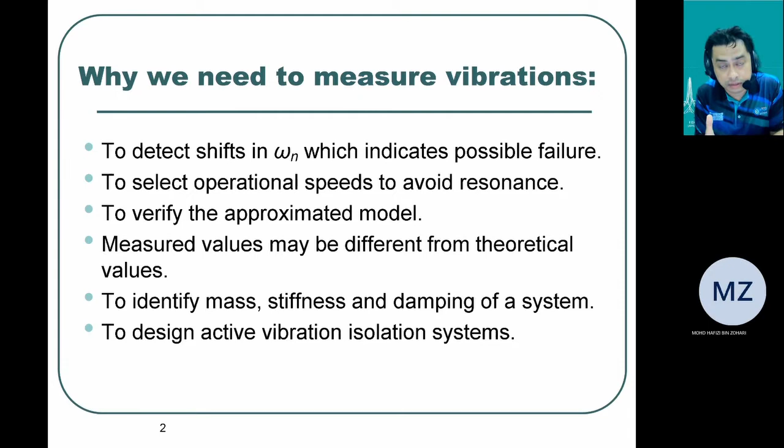Moving forward, the vibration measurement. This is actually the block diagram for the vibration measurement. First, we have the input, which is the vibrating machine or vibrating structure. We use the transducer, in this case a vibration transducer or vibration pickup, as the transducing element. Then we go to the next element, which is the data conditioning element. In this case, it is a signal conversion instrument, with which we convert the signal from mechanical into an electrical signal. And then we have signal processing and display, either in a recorder unit or in the computer.

And then after we have completed the acquisition, either we store or we display, and after that we do data analysis. Usually for vibration measurement we collect the data and then we do post processing of the data, because we deal with a huge amount of data. So it's very important for us to do post processing.

If we have lag in terms of showing the actual measurement, it will give a false representation of the data. So we have to be careful on the type of data that we want to process. All right, so we're gonna look at a few types of transducers that will be used frequently for the vibration pickups or vibration transducer.

First, we're gonna look at the variable resistance transducer. This kind of transducer is based on the strain gauge. The strain gauge will be pasted on the cantilever beam. We have a cantilever beam here that connects with the mass. The whole cantilever beam is fixed on the base structure. The base structure will move together with the vibrating body. It will be put on the vibrating body, so the base will move together with the body.

Imagine that the mass tries to remain at its position while the base is moving up and down. So the mass will try to stay at this position, and this cantilever beam functions as the spring. It has its own K. But this K here is not the stiffness of the spring; this K is actually the gauge factor of the strain gauge. In the previous lecture, I usually put it as G, gauge factor, but for this topic it uses the K value. Do not confuse it with the K of stiffness.

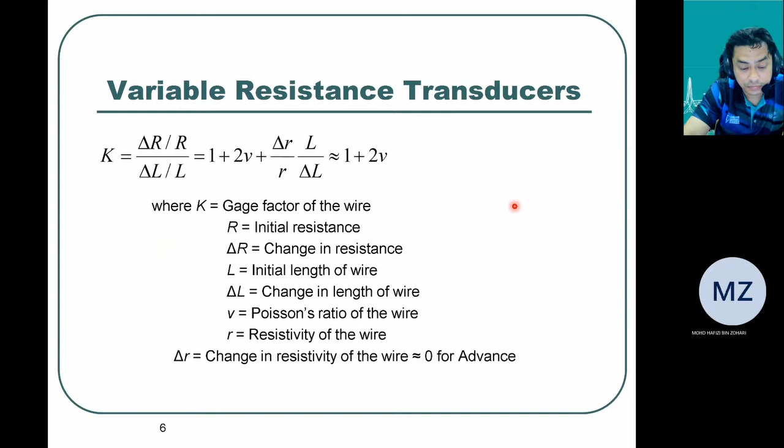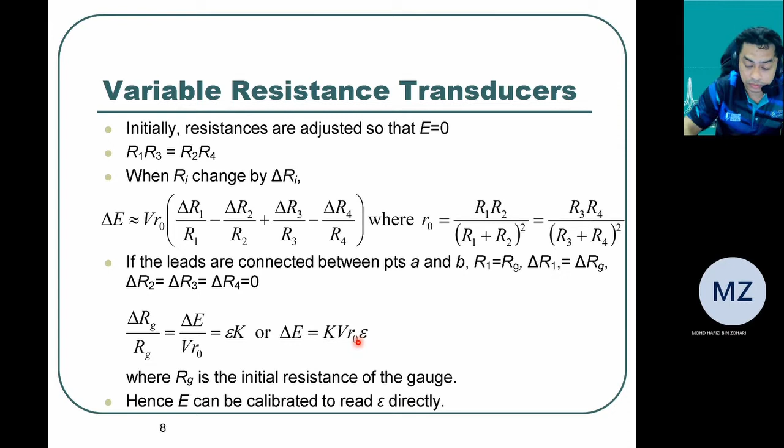So now this one is the theory if you use variable resistance for the measurement of vibrations. With the same structure, we can also use piezoelectric transducers. The fundamental is we want to find the change of voltage due to the vibrations, because the change of voltage will indicate the change of strain. So in this case, if you use a piezoelectric transducer, the charge generated from the motion x(t) can be related with the equation here.

So first, we know that for piezoelectric materials, the charge Qx is equal to Kf. K is the piezoelectric constant. If you have force acting on the piezoelectric materials, going further, F is equal to A, the area of the piezoelectric structure, times the pressure that acts on the piezoelectric materials.

So if you look at here, we have the same concept. The difference is this one is a spring, the previous one is a cantilever. Why do they use a cantilever? Because a cantilever can be used to paste the strain gauge. But if we're not required to have something to paste the strain gauge, we use a spring. And in this case, the spring just holds the mass.

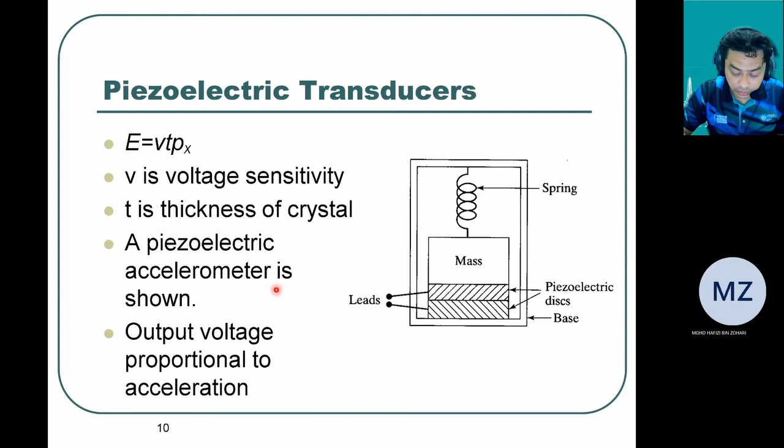Now this one is quite easy compared to the strain gauge. Just a simple equation: E equals V times T times P. V is the voltage sensitivity, T is the thickness of the crystal, and Px is the pressure, related to the force from the mass on the piezoelectric materials. So if you look at this example, we have a crystal with a thickness of 2.5 mm subjected to a pressure of 50 psi.

Okay, find the output voltage if the voltage sensitivity is 0.055 V·m/N. So just plug in the value. First, we know that the voltage sensitivity is in units of voltage, meter and Newton. So that means 50 psi needs to be converted into Newton per meter first. Then that's the conversion factor here. Then just calculate straight away.

We get 47.4015 volts. So it's quite a huge voltage, because 50 psi is a lot. We usually feel the pressure of our car tire at about 30 psi. So 50 psi is a very huge amount. That's why it got about 47 volts from the piezoelectric.

All right, so we looked at the variable resistance. Now we're looking at the electrodynamic transducer. Also related to vibration, but now we're looking at the velocity. In the previous one, we related it with x(t), the displacement of the mass. It's related to the strain and also the piezoelectric charge. Now for the electrodynamic transducer, it relates to the velocity of a moving body.

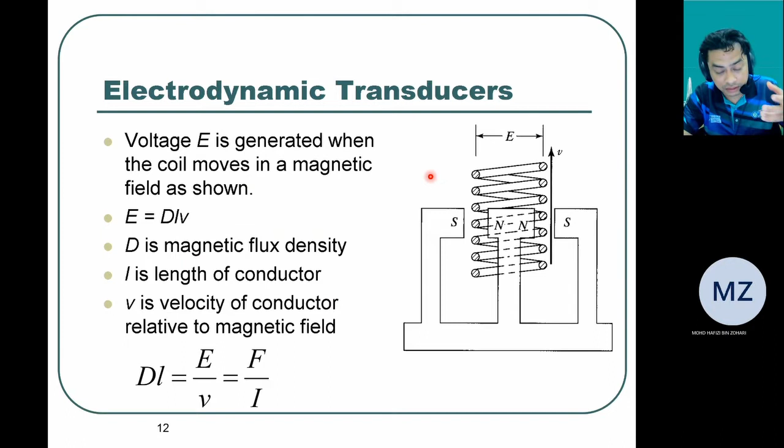No input, no output. So if you compare with the previous one, that one is totally generating the voltage due to the motion of the coil and the magnet. But the LVDT, or linear variable differential transformer, depends on the input voltage, the primary coil that gives the magnetism to the core, and then it will cross with the other coil and generate the output here.

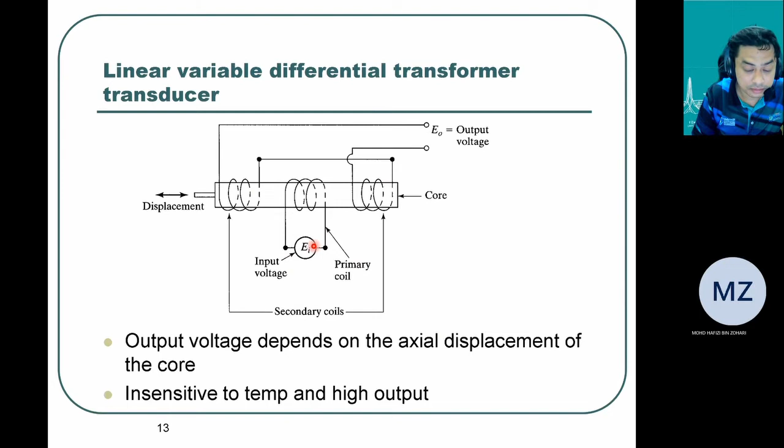All right, but this one, because it has its own input, can give a huge amount of voltage change. For a small displacement, we can get a big output voltage, so we can have a very sensitive measurement. Of course, a sensitive measurement leads to more accurate measurement compared to just a pure coil and magnet. Okay, so this is another view of the LVDT, linear variable differential transformer.

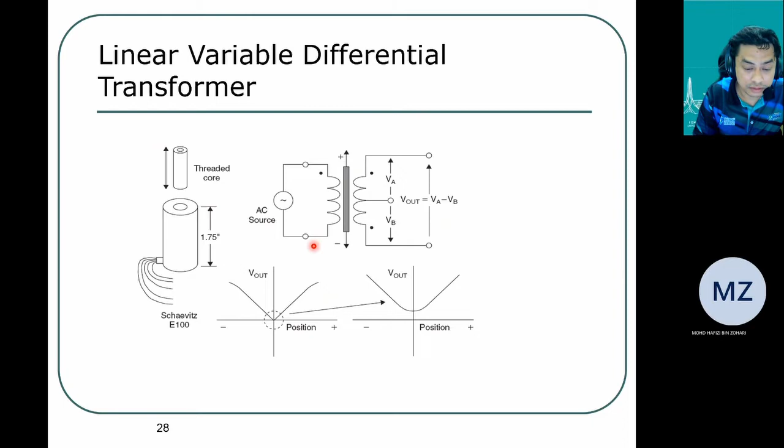Then we go to the accelerometer. We look at the accelerometer. What is an accelerometer? An accelerometer is a device that measures acceleration, including static measurement as well as dynamic measurement. Most of the accelerometers in the market are piezoelectric-based accelerometers.

You can Google. There are a lot of examples, and in our vibration lab I have a lot of examples of accelerometers. In fact, in the lab we also try to build our own accelerometer. The output of the accelerometer, as I mentioned earlier, is an electrical output, either from the strain gauge, the piezoelectric, or the capacitor if you use a capacitor base. So the electrical charge or electrical signal is proportional to the acceleration of the body that we are measuring using this instrument.

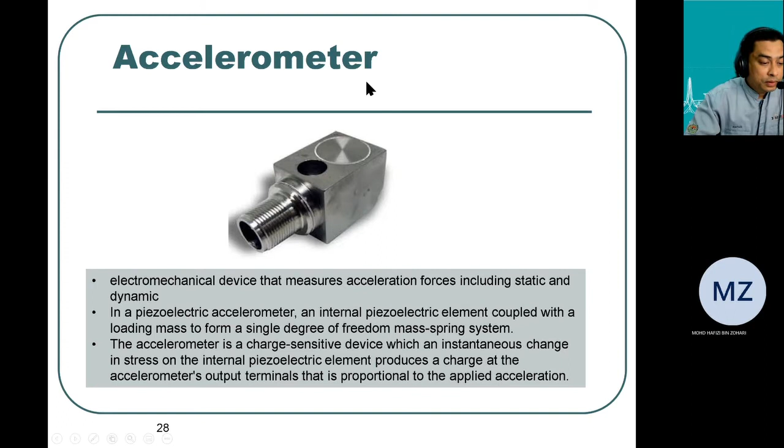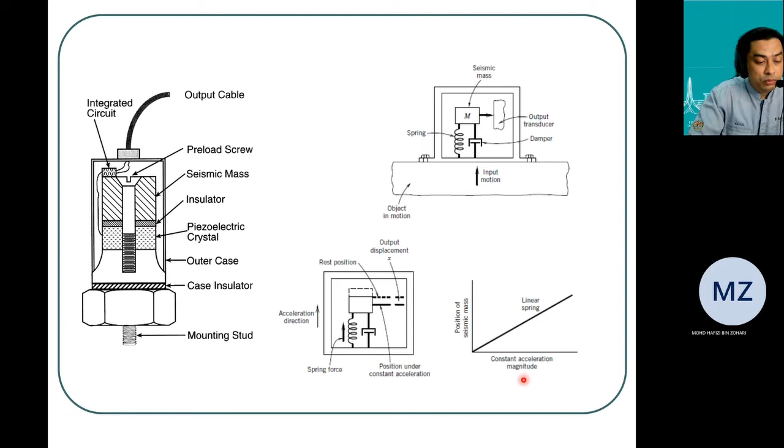So basically, if I show this real construction of the accelerometer as a spring mass damper relation, it is something like this. In terms of the position of the mass, it goes up and down. The position of the mass is linear with the acceleration magnitude. So the more displacement of m, the more acceleration of the body, the object that we want to measure.

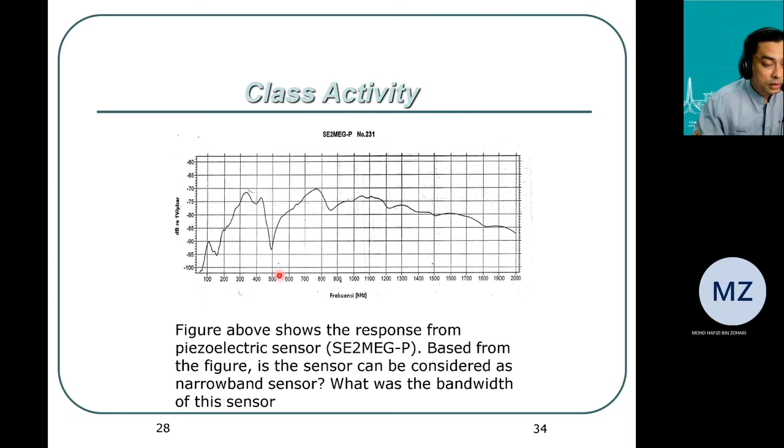Okay, if you look at this one, this is actually a frequency response curve, the same as this curve, but this is theoretical. Looking at this one, at a certain range it is flat, but at some range it has a very huge resonant frequency, which is where we have high sensitivity of the sensor.

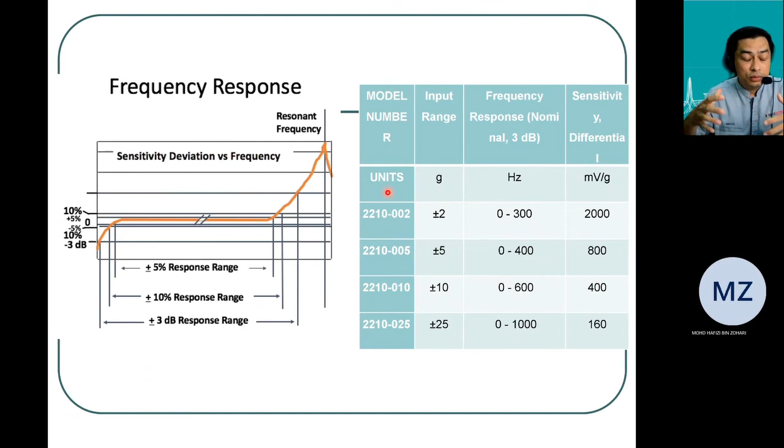the sensitivity becomes low. Related to this graph here, if you have a broader range, usually it has very low sensitivity, but this area here has very huge sensitivity, but in terms of range, it's a very small range only for this kind of measurement. Okay, that's how you read the specification of any accelerometer when you want to choose the correct accelerometer for your application. All right, so we finish with the accelerometer specification. Hopefully after this you can choose the best accelerometer for your application.

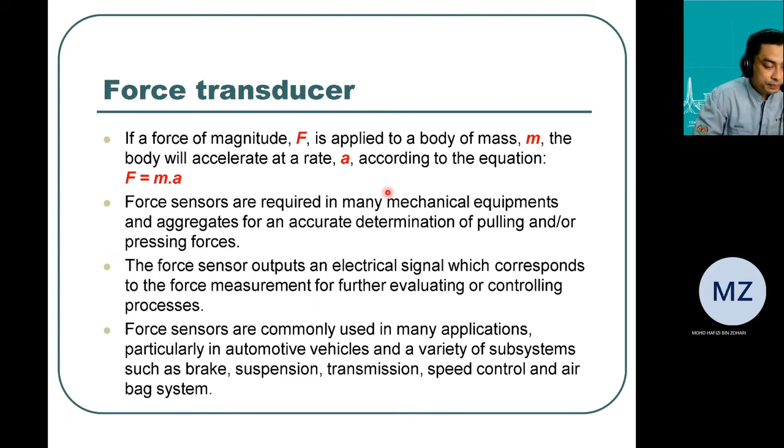And then if you look at this one, we also have a force transducer. So of course we have F equals MA. When we discuss vibrations, it's actually related to force as well, because any acceleration is because of the existence of force. Okay, so force can be measured by many methods. One of the methods is by measuring, of course, A, acceleration. So we measure A and then we can find F. Then how can we measure M?

Okay, mass. We have a lot of experience measuring M as weight measurement. I believe everyone of us already knows how to measure it and has their own instrument in their house to measure their own weight. But the fundamental of weight measurement is they use either the load cell, pneumatic load cells, or electronic load cells, or most fundamentally, a mass balance instrument.

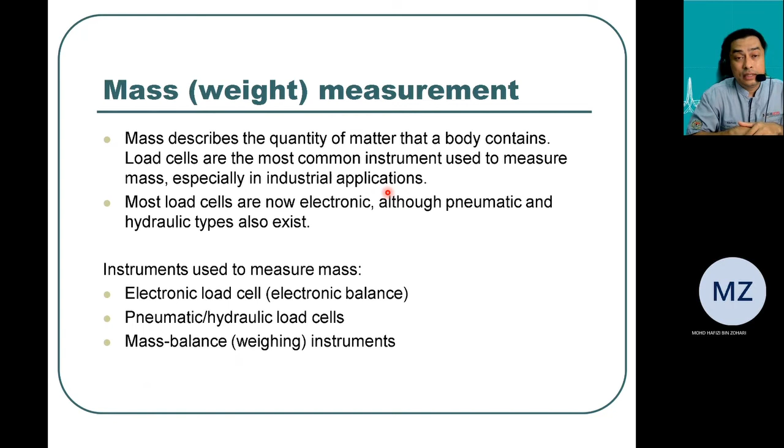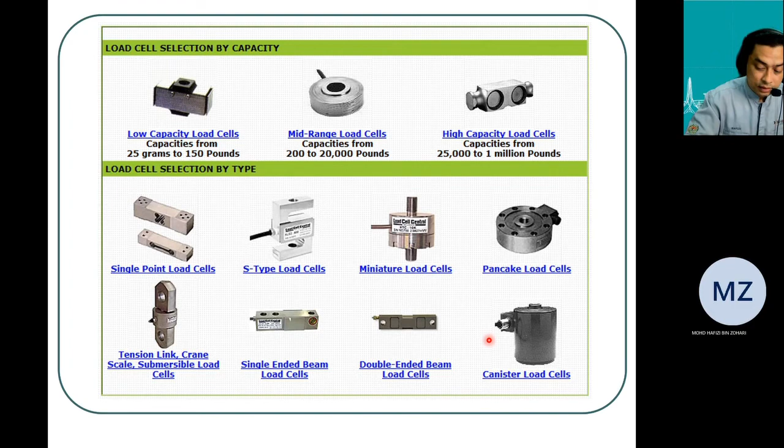All right. So then we move to another type of mass measuring device, which is the pneumatic or hydraulic load cell. Same concept as the electrical base: it must induce some sort of movement. If we look at the previous load cell, it deforms. The deformation can be sensed, detected by strain gauge and also the piezoelectric gauge. For this one, it produces some sort of deformation in the air gap,

it's actually the air pressure. If you put a mass, a very huge mass, the pressure inside the air will be uniform, and it will transfer along the line that has the same air. For example, we have this one. If we have air along this tube, the pressure is uniform. We put a pressure here, the pressure starts here, but along the way in the pipe, the pressure will

still remain the same. So if you can relate that air pressure with the mass, then we can find the mass. For the electrical base load cell, we relate between mass and the electrical signal, the voltage. But for this one, we relate the mass and the pressure of the air. Not only air, we can use fluid as well. So if you use air, it is pneumatic. If you use fluid, for example oil, it is the hydraulic type of load cell.

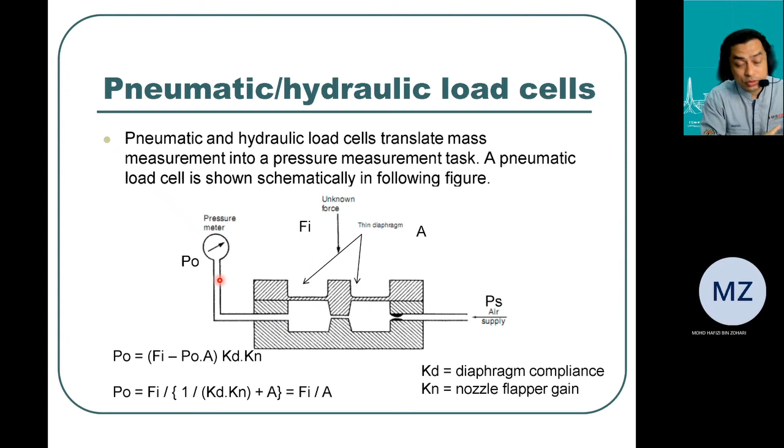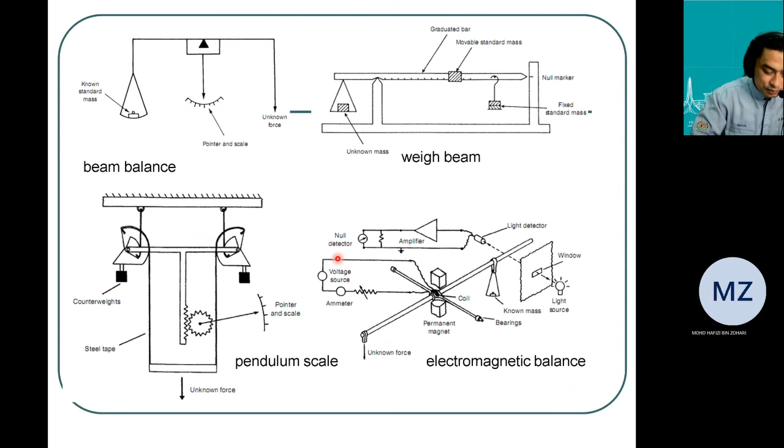All right, so now we looked at the accelerometer, and we looked at how to get force, which is basically using an accelerometer and calculating the mass. And then this one is the torque transducer. For torque transducers, we have three common methods. The first is measuring the reaction force of the shaft. The second one is the Prony brake, and the third one is measuring the strain produced by the

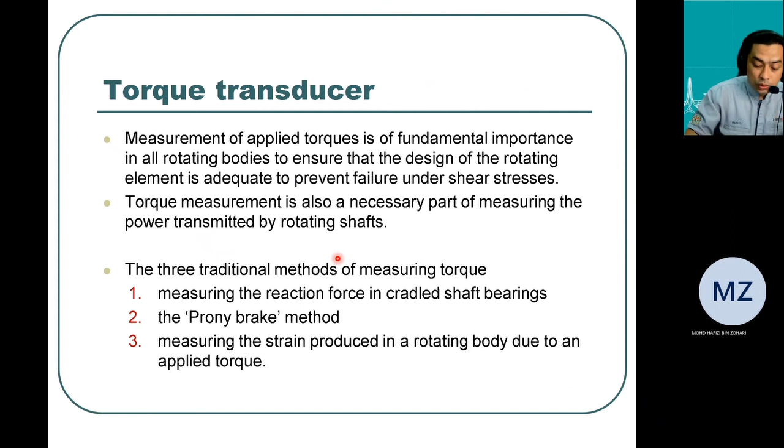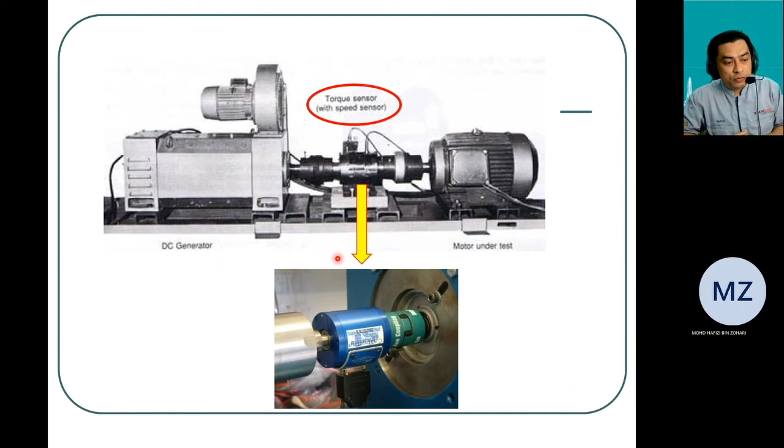rotating body. Of course, when the body rotates, it will have some sort of twisting effect, and that twist is produced by the torque. Then we can measure the twisting using a strain gauge or any gauge that can measure the strain. So we look at these transducers one by one. This is actually the torque sensor. You can Google; there are a lot of examples of torque sensors available.

Basically, this one is a dynamometer. So we have a motor that works in this area here, coupled with the dynamometer. Inside the dynamometer, it has some sort of a power absorber. It tries to hold the movement of the motor.

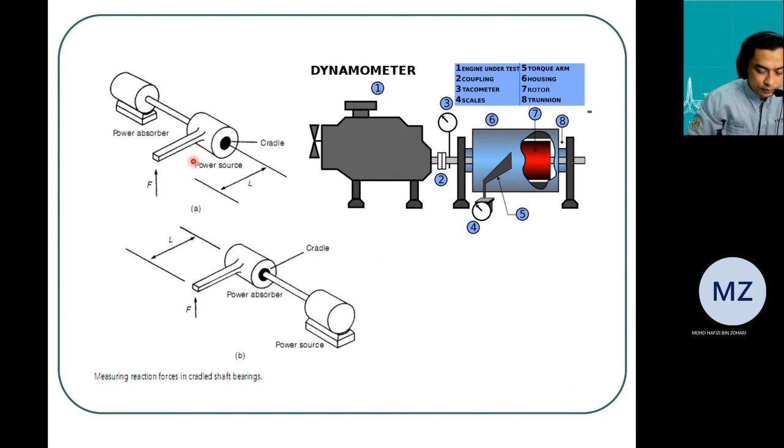All right. So the Prony brake is a simple mechanical system. It's actually some sort of brake coupled with the moving shaft. It will try to rotate the drum, and that rotation will pull the spring. We measure the force in the spring, and then we can relate it to the torque that is the source of the movement in the shaft. Okay.

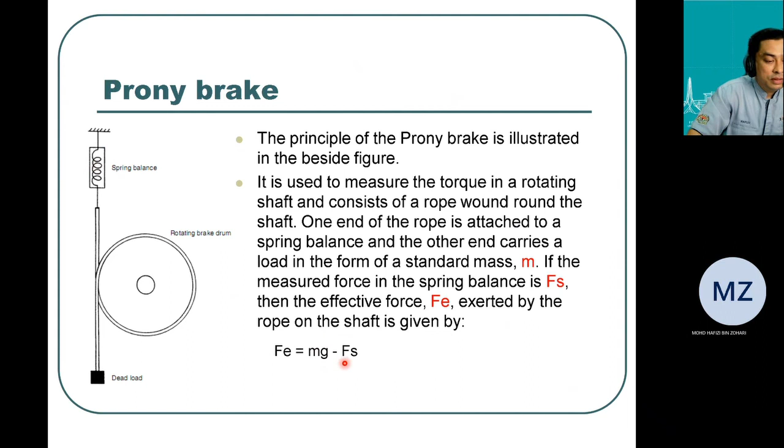So the equation is something like this. Fe is the force exerted by the rope, mg is the mass, the dead load here, and Fs is the force of the spring. So Fe is equal to mg minus Fs, the force measured at the spring. Then we can find Fe. That's how the Prony brake works.

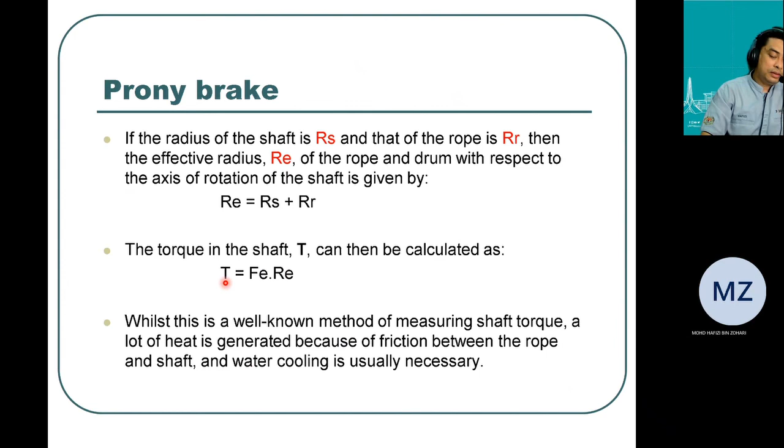Then from that Fe, you times by Re. Re is the effective radius. Force times the radius, you can find T, the torque. That's the concept of how torque is measured by the prony brake.

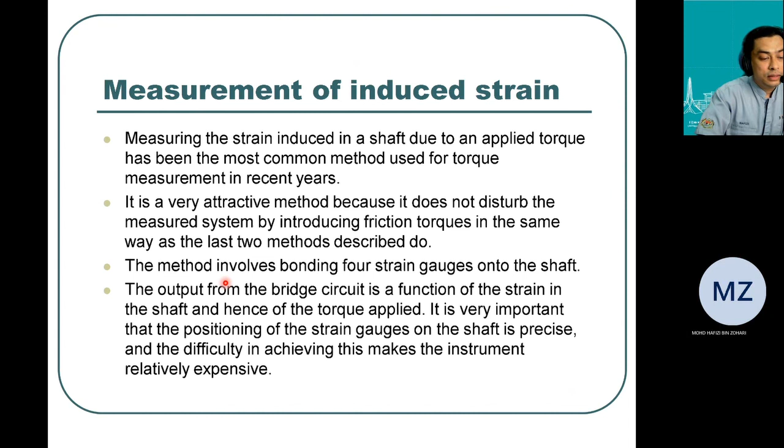And the last one is strain, if I can put the figure here. If we have strain, it will deform or twist the shaft a little bit. The twisting is linearly related to the torque. The more torque, the more twisting happens to the shaft, but you will not see that with the naked eye.

Just put the strain gauge on any location there and you can measure the strain. You can put it in a lot of places, for example four places like this one, and then you can have a more accurate measurement. You know how the strain gauge works from the previous slide. So just measure the strain; it has a linear relation with the torque.

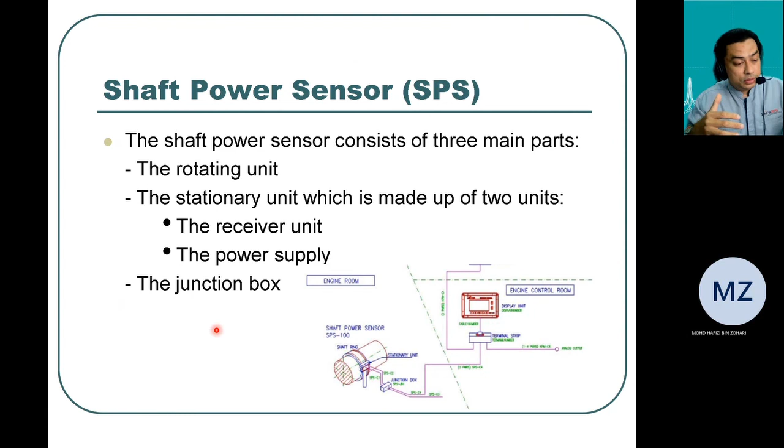Okay. So the power: if you look here, power is equal to torque times RPM. If you find the power value and measure torque, we can also find the RPM. I will skip this one because we know how the strain gauge works. Like I said, power equals torque times RPM, so this is how to measure the power. I will not go into detail on this one.

So that's torque measurement. We have three types of torque measurement: the first is the dynamometer, the second is the prony brake, and the third is strain-induced measurement. We measure the strain due to the twisting caused by the existence of torque.

And the last one I want to show is the tachometer. You can see this one in the lab; I will show it in the lab later on. This is a digital tachometer. We have a lot of tachometers. You can say the concept is like a stroboscope.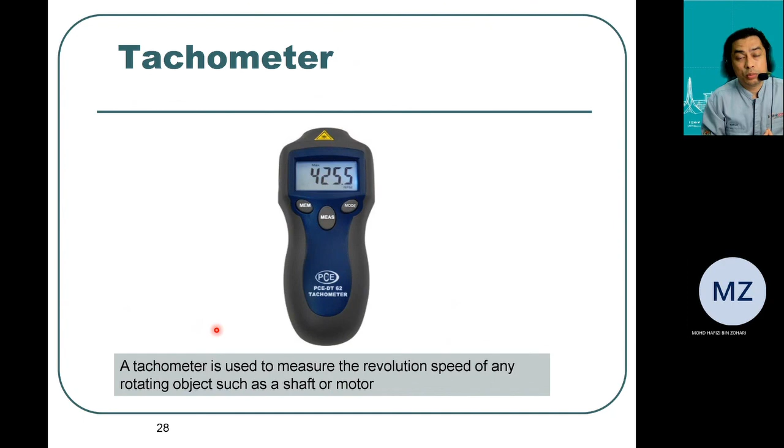A tachometer measures RPM. If you have a power meter and a torque meter, you can calculate RPM. But if you measure RPM directly and know the torque from the motor, you can also reverse it to find the power produced by the motor. So a tachometer or stroboscope can be used. The tachometer is based on laser; the stroboscope is based on light. I think you learned the stroboscope in physics class at school.

All right. So this is the end of our class for the whole subject. Hopefully you have looked into the four important sensors: the strain gauge, pressure measurement, temperature measurement, and accelerometer. All of this is integrated. Hopefully you can utilize it in real engineering applications.